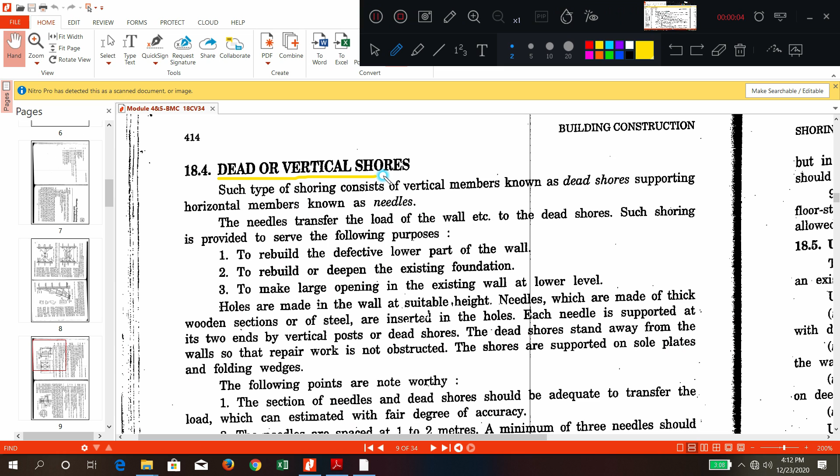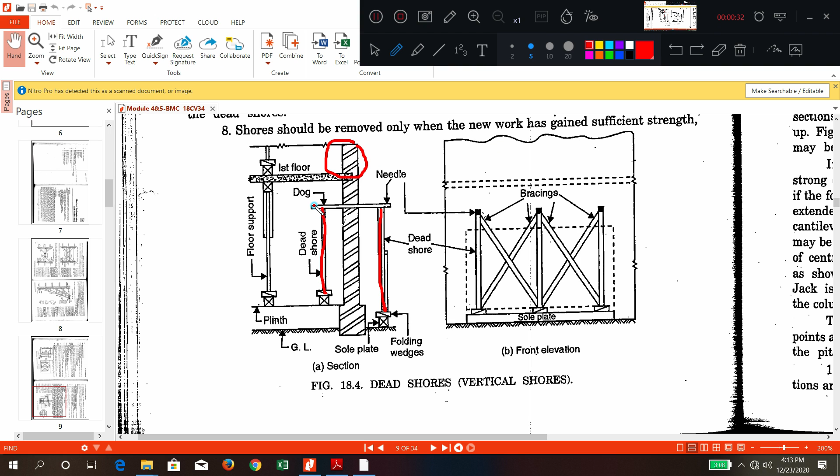Good morning. So we were discussing dead or vertical shores. We have seen this diagram here. Whenever there is an existing wall and you want to increase the foundation depth, do some repair work, or fix a door, you need to support the top portion while repairing. So at that time, you insert the shoring works in the vertical direction. This is called a dead shore or vertical shore.

So what are the different members? You have this wedge piece, or base plate. What is this called? Sole plate. And these are called wedges or folding wedges. So these vertical elements themselves are called dead shores.

The horizontal member is called a dog, or sometimes it is called a needle, which is inserted like this. Where is the floor? Floor is here.

Again, you can have multiple supports here also, for the floor support, where the plinth is. Again here the plinth is there, you have sole plate, wedges, and again vertical supports. These vertical supports are nothing but dead shores or vertical shores. So like this, you can have multiple supports.

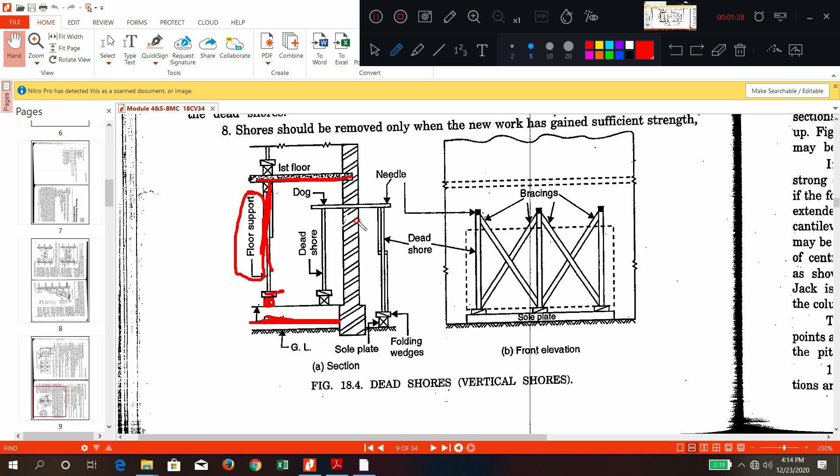So now we will see where it is used. Whenever you rebuild the defective lower part, when the lower part is defective and you want to do repair work, you use it to rebuild the existing foundation. When you want to make the foundation much deeper, or when you want to make an opening in the wall.

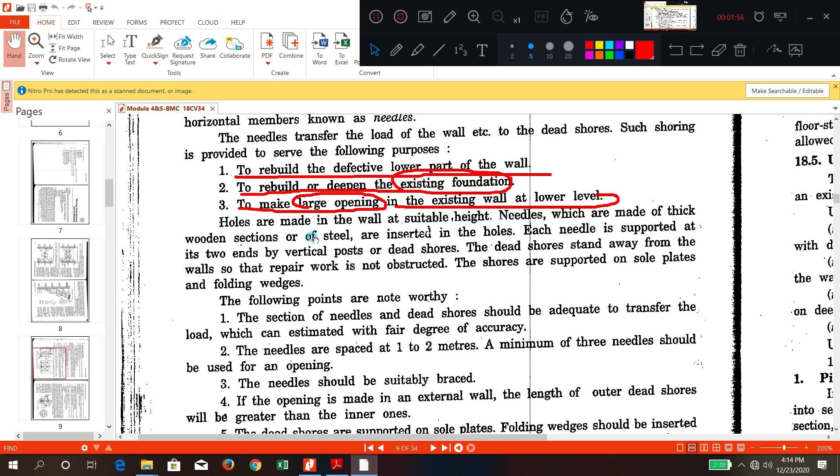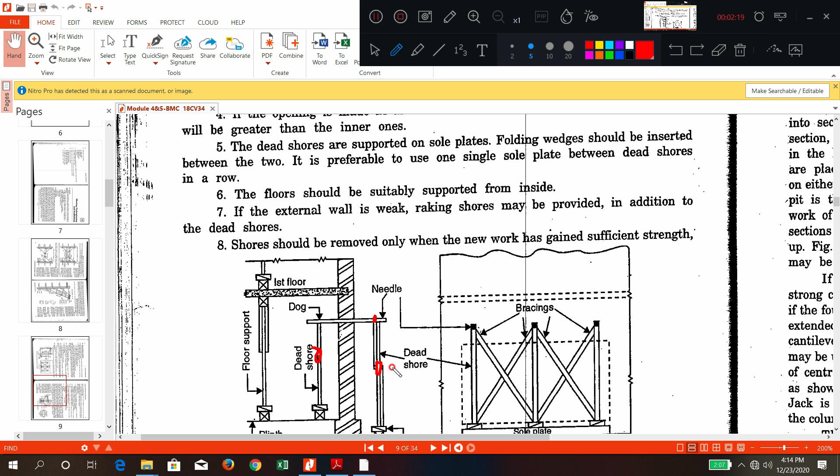So that is general about dead shore. What are the points you should remember? Let us see the first point. The sections of the needles and the dead shores should be adequate to transfer the load. Depending upon the load, the size and section of the needle and shores should be decided. The more load there is, the more cross section is required.

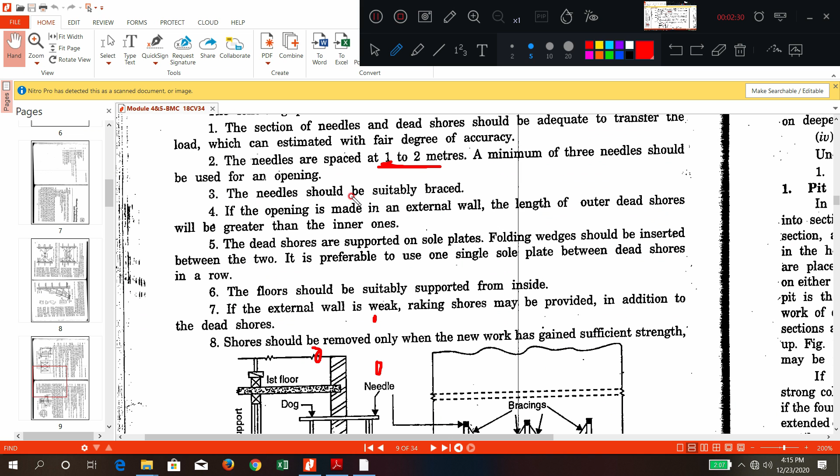The needle should be kept at 1 to 2 meter distance, that is common. Needles should be braced, meaning here in the front portion you can see these needles appearing like this in the front elevation. So to support that, you have cross braces like this. This is a vertical shore, and to make it stronger, you have cross braces.

So again here is another point: the floors should be supported, meaning inside the floors should be supported. If the external wall is weak, then you can go for raking shores plus this shore, both shores together.

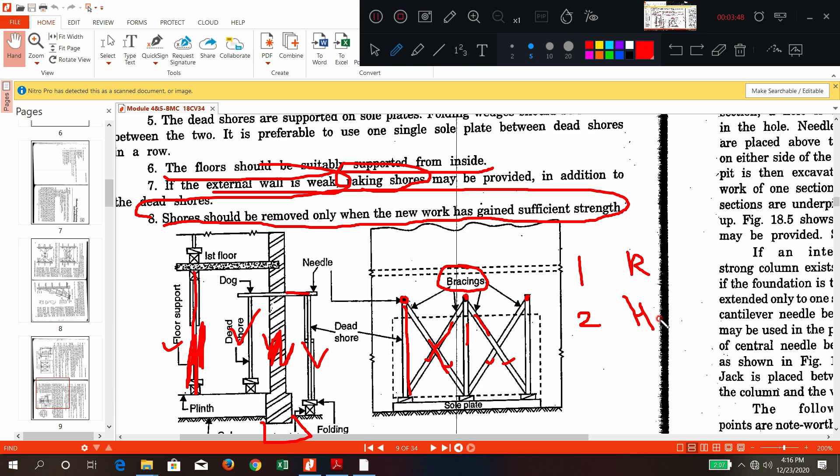The shores should be removed only when the new work has gained sufficient strength. Only when sufficient strength is there for the new work, this repair work or foundation work, then only you remove this shore or internal supports. We have discussed 3 points: one is inclined or raking shores, second is horizontal or flying shores, third is vertical or dead shores. 3 types of shoring works we have discussed now.

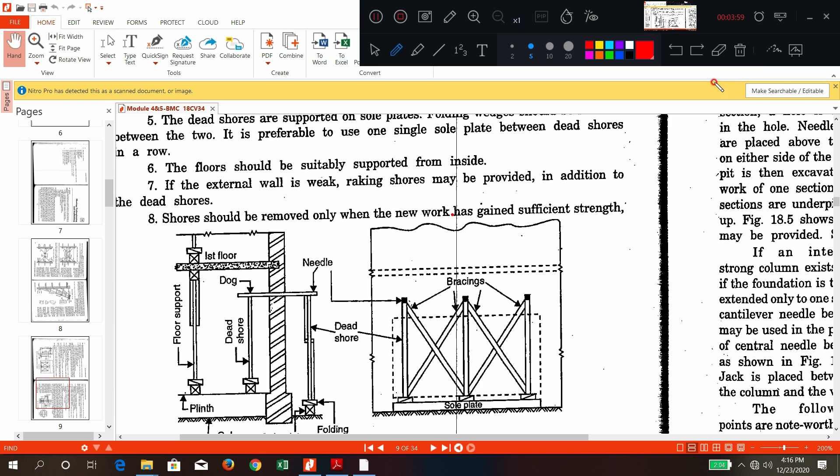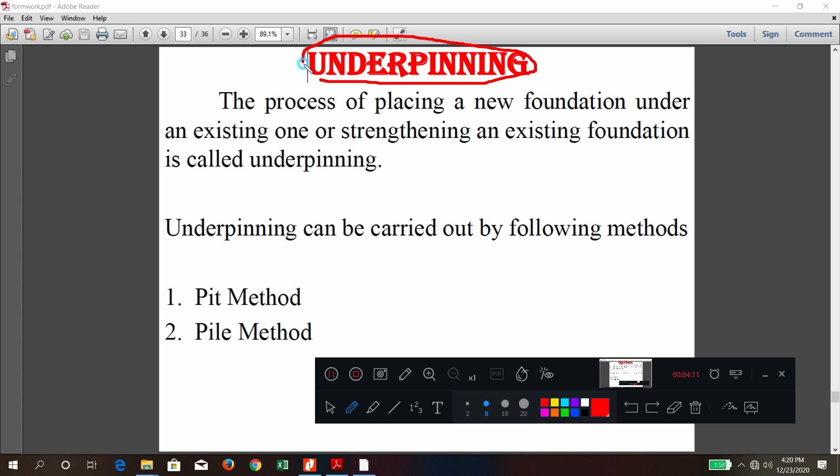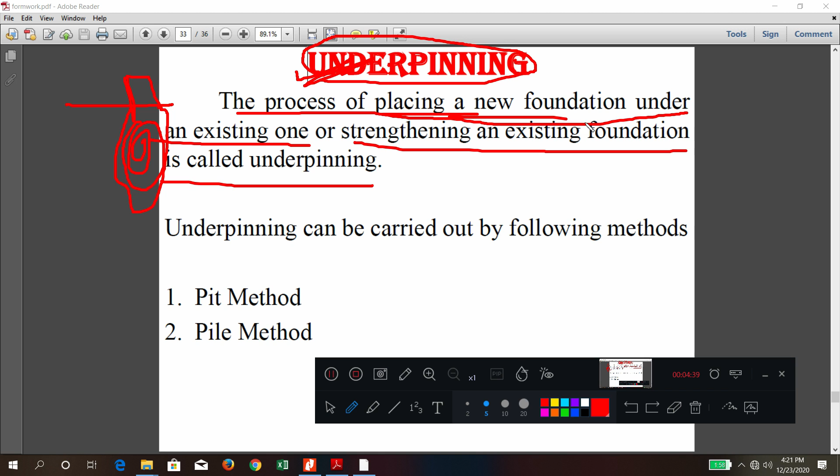Next concept that we are going to discuss is underpinning. So what is happening in underpinning? The process of placing a new foundation under an existing one, or strengthening an existing foundation, is called underpinning. There is a wall, and you want to increase the foundation depth or make that foundation stronger for the existing one; that procedure is called underpinning. Generally it is done by 2 methods: one is pit method, another one is pile method.

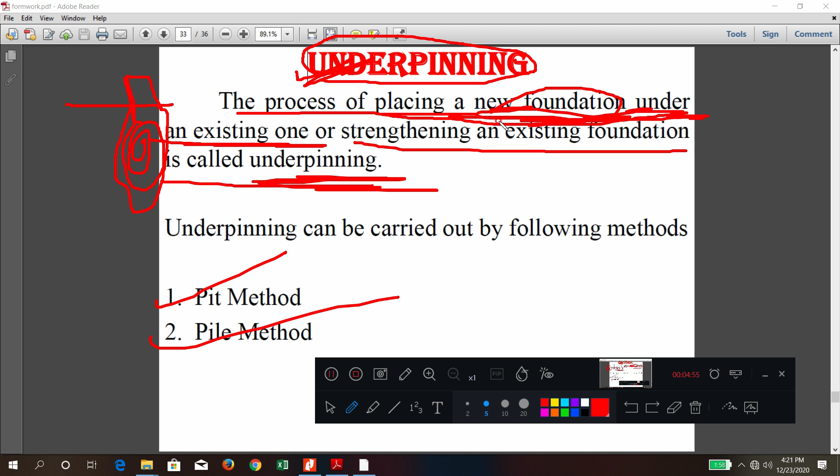Now when you want to do the underpinning, can you see this one? So here you can see this is the cross section of the wall.

Up to here there was the foundation. Now you want to increase the foundation depth, this is the new foundation. So in this type of process, where existing foundation is only up to here, you want to increase that foundation, make it more deep. This portion is called the new foundation under the existing one. This is called the underpinning process.

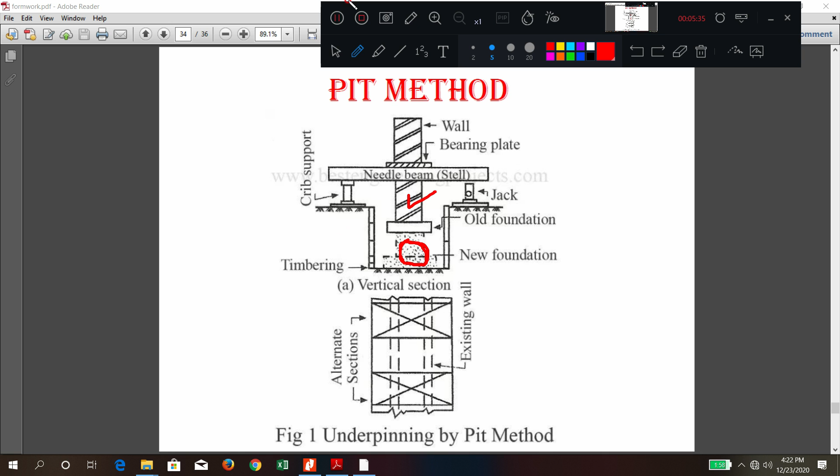Now we have understood what underpinning means. It is used when a shallow foundation is made into a deep foundation - that is the first case. When the existing foundation has settled and cracks appear, you want to do repair work. So to convert and strengthen the existing foundation, we call it underpinning.

Underpinning is done to make the foundation more deep such that strong soil strata is reached, giving more bearing capacity. When you reach a higher depth or larger depth, then only the foundation will be correct. So to make a deeper foundation, you require underpinning. Also, to construct a basement, you require underpinning. So these are some of the conditions when you go for underpinning.

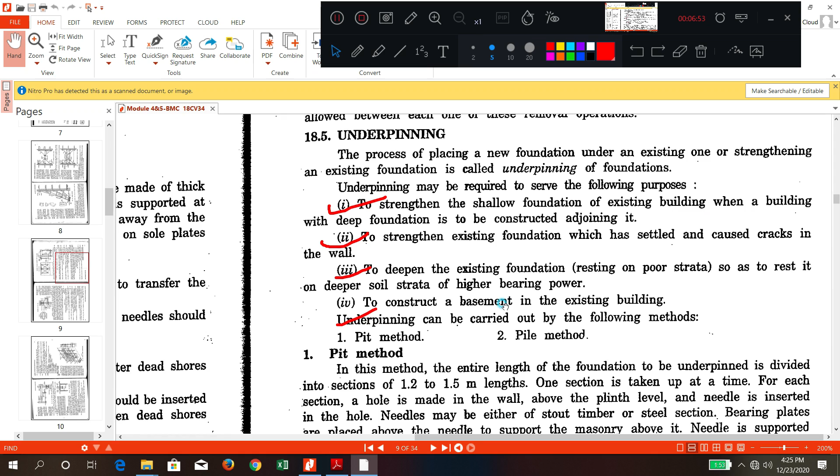Four conditions are there. So there are two methods: pit method and pile method. In the diagram only I will explain how it is done.

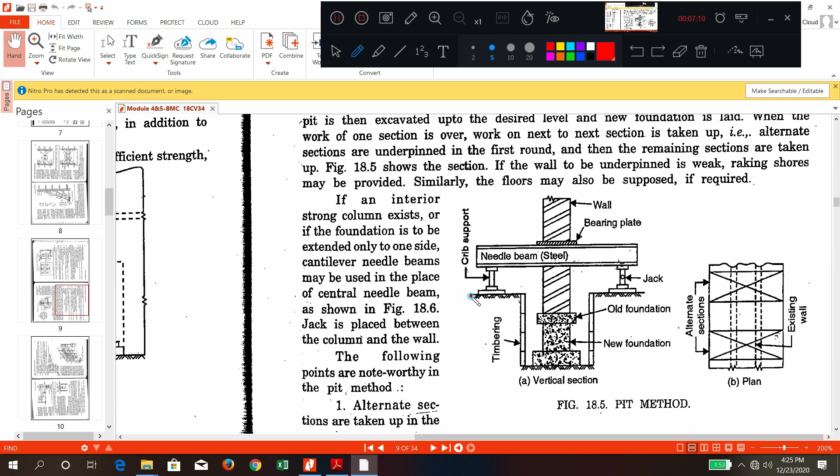Now here you can see, there is an existing wall and foundation, and a new foundation is coming. So how are they doing it? First they are going to insert this needle beam inside the wall. This is not constructed yet, only up to here it exists, the ground is also there, you have not started any excavation. First they insert the needle beam, which is made up of steel, and it is supported on either side like this.

These are called crib supports or jacks. The needle is inserted, and above the needle you insert a bearing plate. Why? Through the bearing plate only, the wall load is transferred to this needle beam and to the sides like this. Wall load is coming like this, acting on the bearing plate, and through the bearing plate the load is transferred to the side grounds.

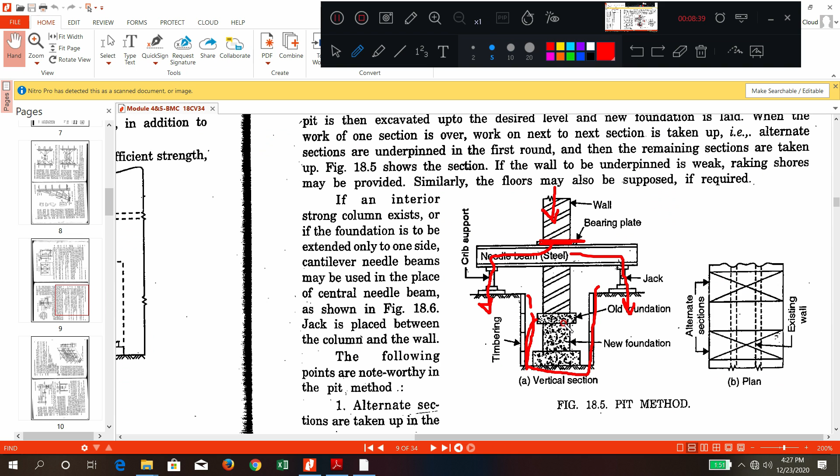After this setup, you are going to excavate this portion. Why? Because it is already supported on the sides, so you start excavating. After excavation, this center portion is newly concreted, so this is called the new foundation. Whatever load is coming goes like this, so that is why the new foundation can be made here.

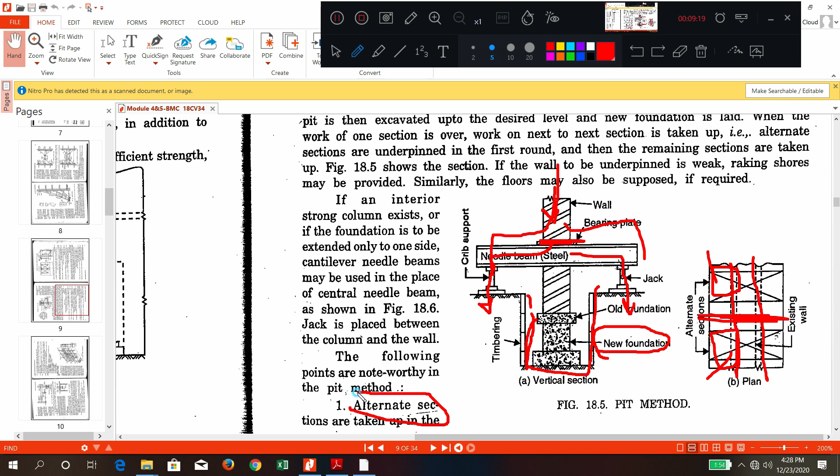If this is the top view, alternate sections are taken. Meaning, first this section is done and this section is done, while the center portion is not done. Later, when these two foundations are laid, the center portion is completed. This is called taking alternate sections for the pit method - meaning you should not continuously insert needles one after another.

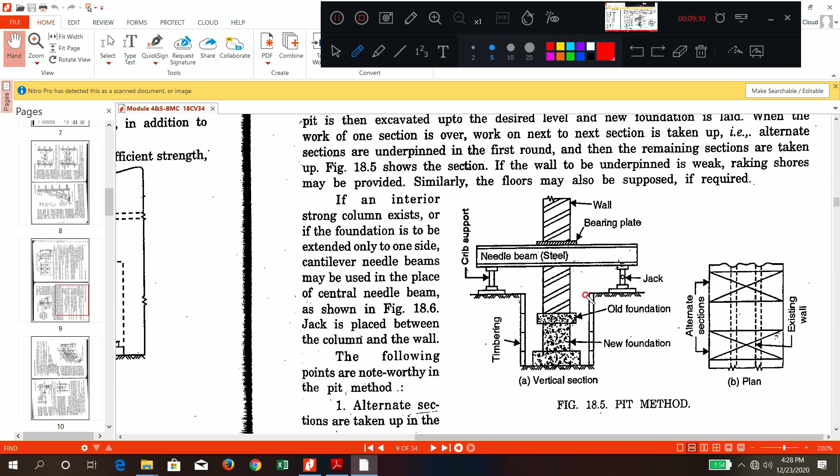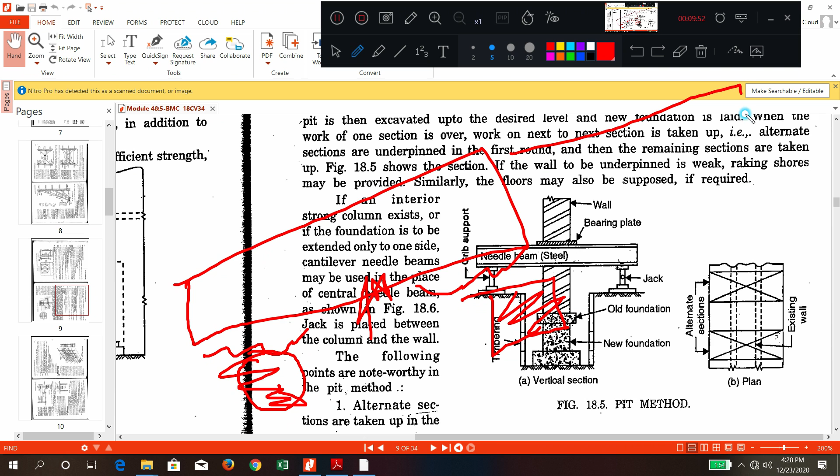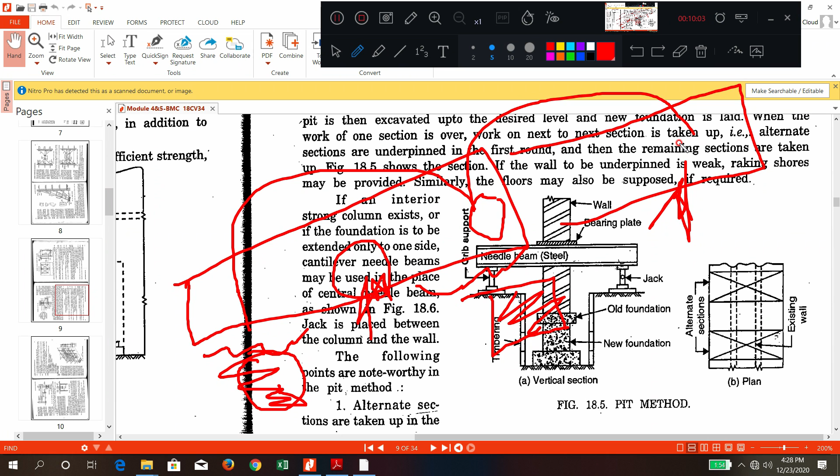Underpinning should be done section by section. Like this, where the wall is, first this portion is underpinned and then this portion is underpinned. Later, when the total foundation is made strong and proper, then the next section's underpinning is done, and then another section is taken. So it is called leaving one section and taking another - this is called alternates. Underpinning is always done in alternate sections.